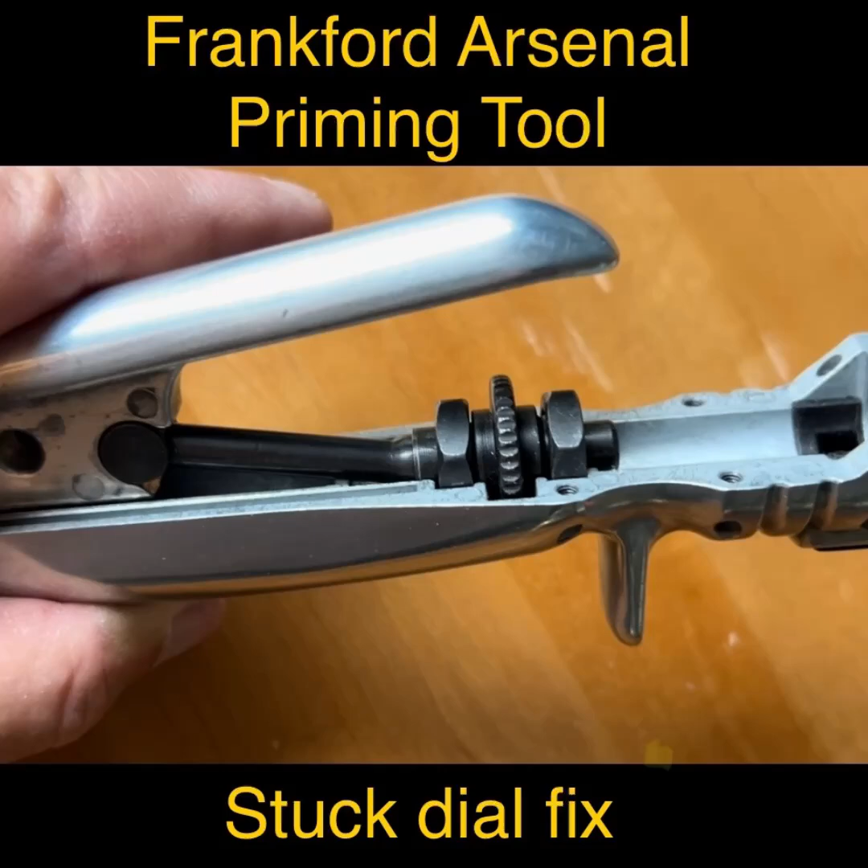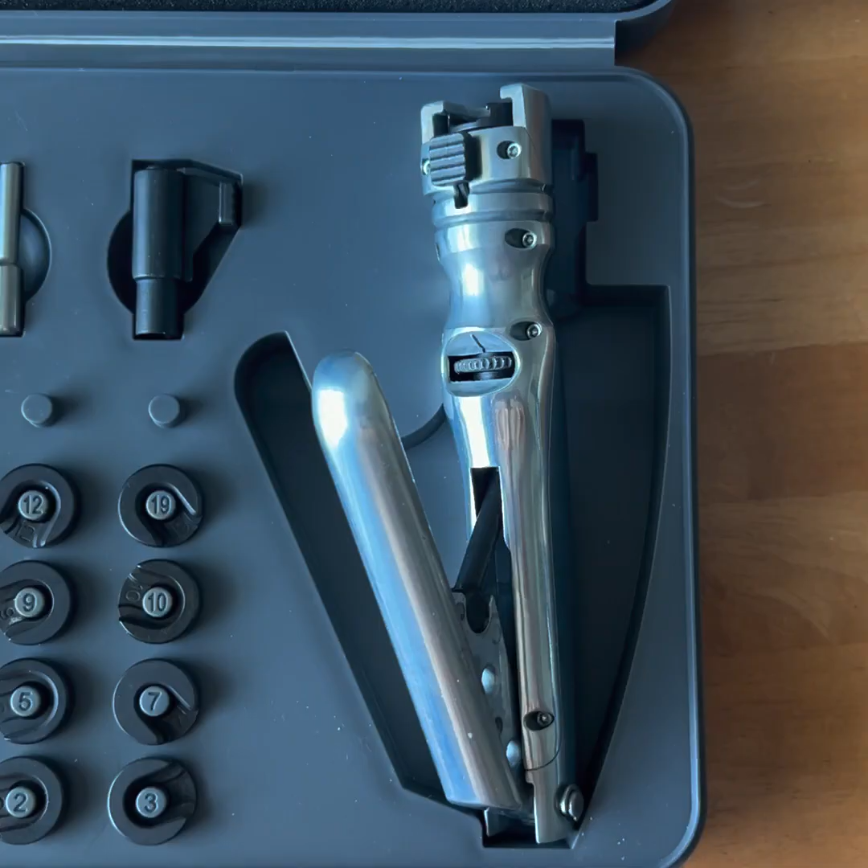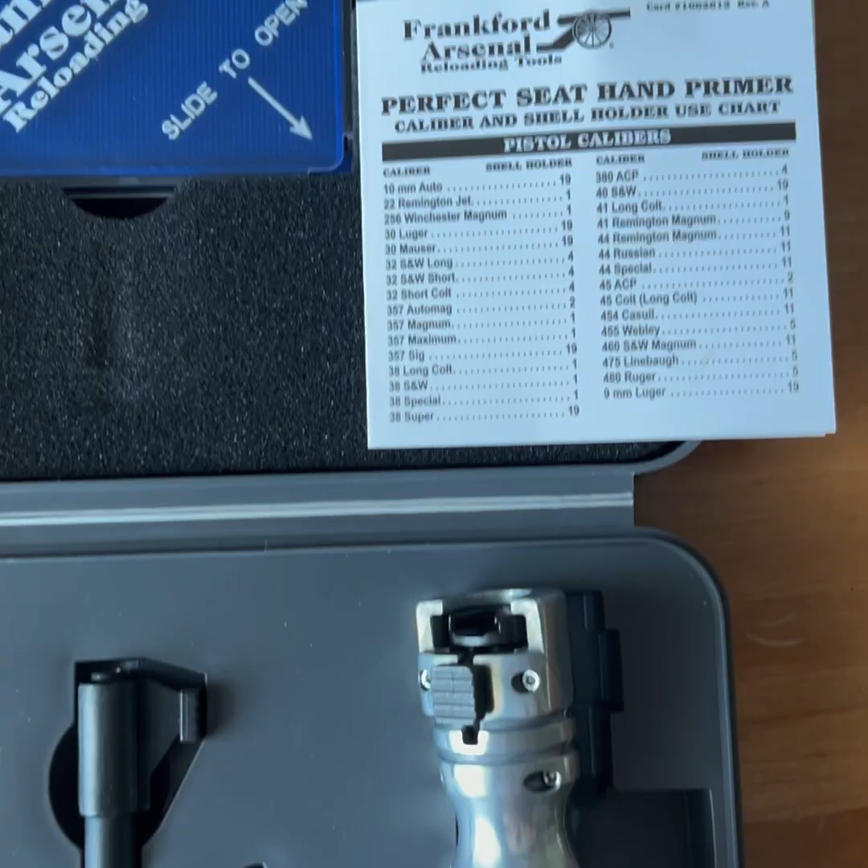The Dial of Disappointment. This is the Frankford Arsenal hand priming tool, and it appears to be a well-constructed tool with numerous shell holders for various calibers, a large and small priming rod, a primer tray, brief instructions, and a guide for shell holders for different calibers.

The problem I had relatively quickly in using this as a brand new tool is that the dial would freeze up, and turning the dial left or right adjusts the seating depth of the primer by about 1/1000th of an inch. When I tested it, there were about 32 clicks between left and right, so it gives you very fine control.

However, the dial has locked up, and I've disassembled and reassembled this numerous times, freeing the dial momentarily, but it locks up again. What this video is about is to disassemble and show what's going on, and to fix the dial once and for all.

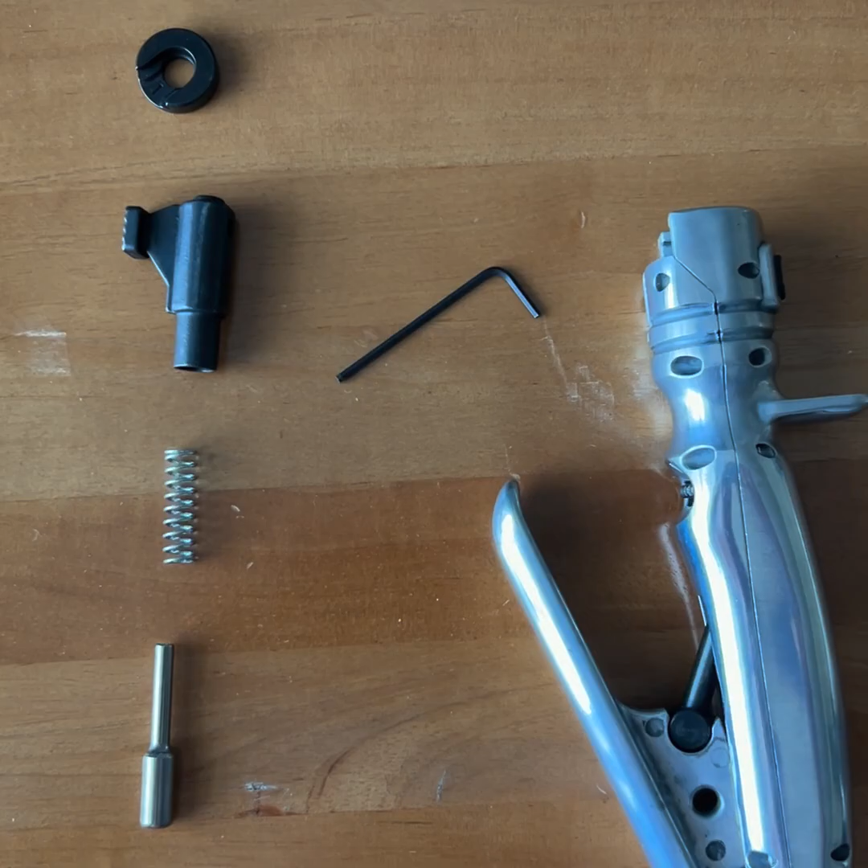The first step is to remove the shell holder and the priming rod, and then remove the 8 screws that hold the two halves together. I've removed the priming rod, spring, sleeve, and shell holder. To remove the screws, you'll need a 5/64 Allen wrench. The screws are all the same size, so you don't need to worry about keeping them in order.

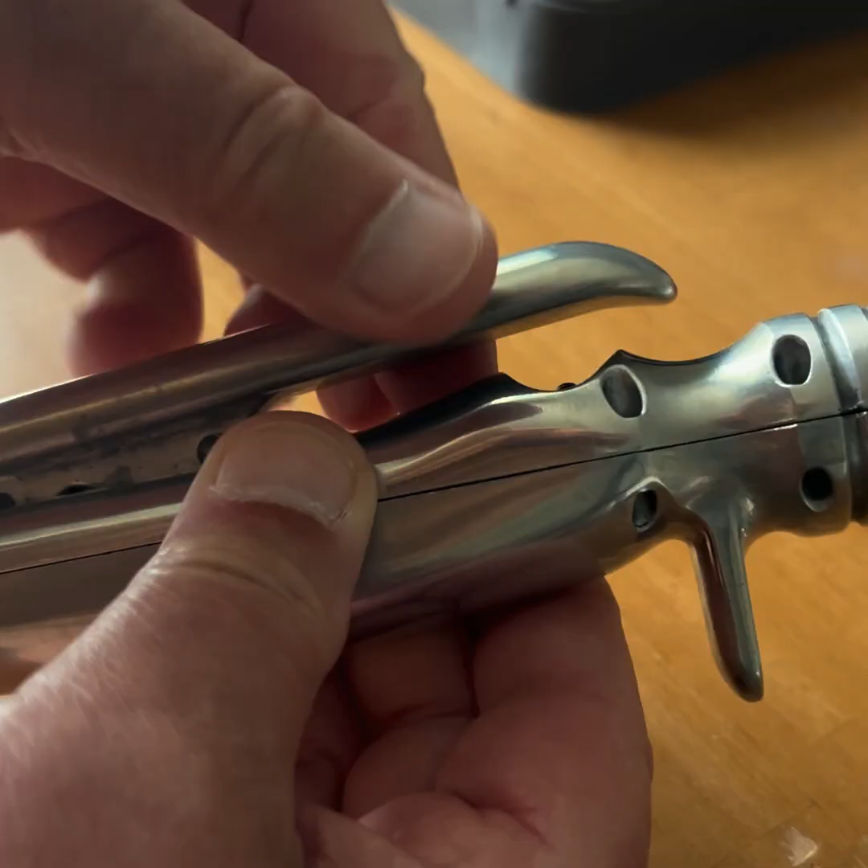Before I separate the two halves, I want to demonstrate that the dial still does not turn. It's stuck.

When you reassemble, it's important, before you put the screws back in, to verify that the dial will turn. The way this is designed is that there is a dial.

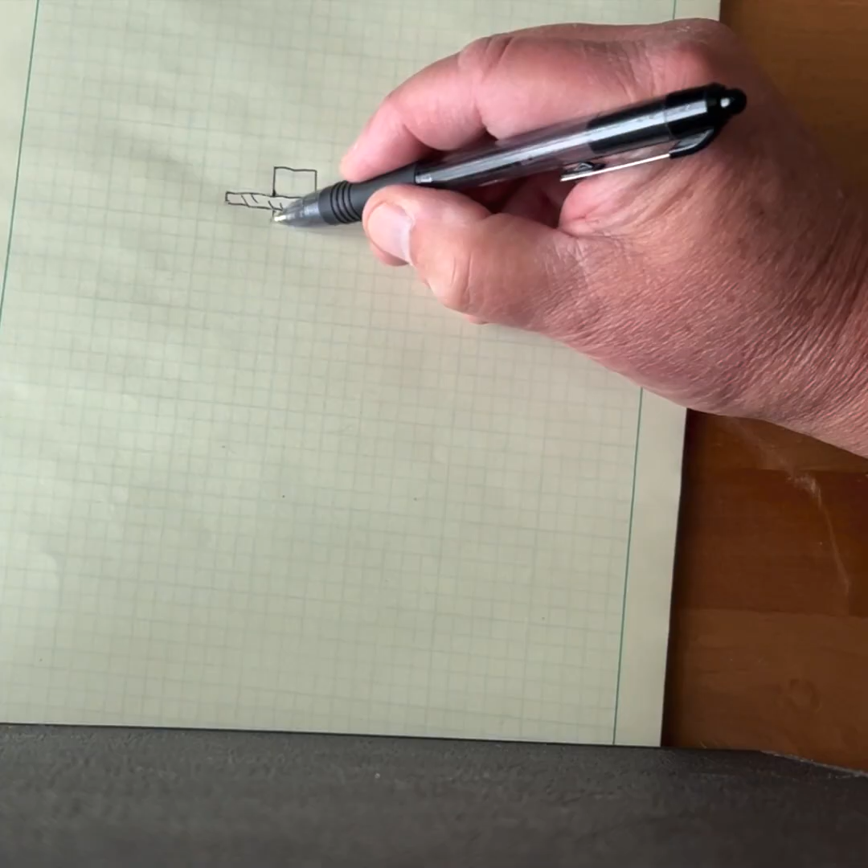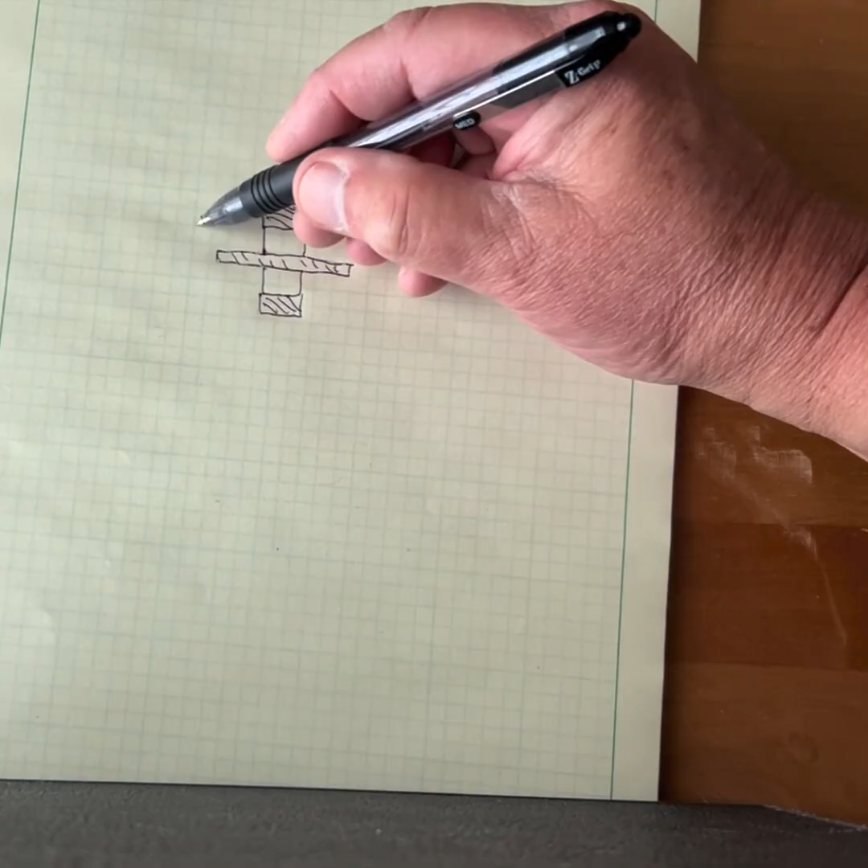It's connected to a fixed and hollow shaft, and there's threads at this end, threads at this end, and there are 2 captive nuts at the threaded ends.

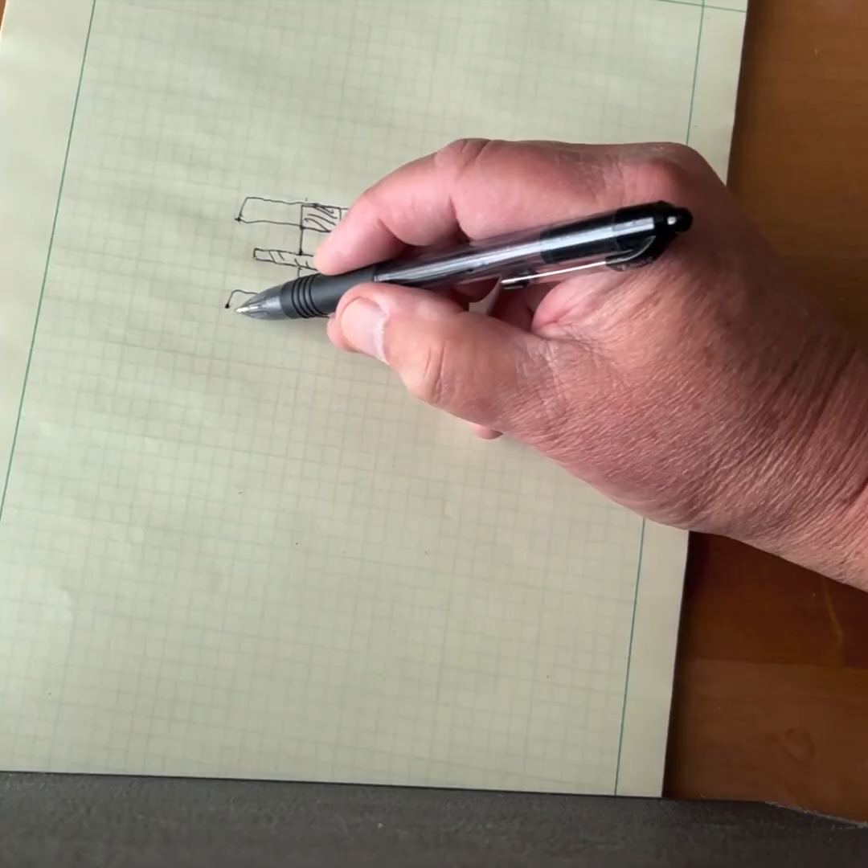As you turn the dial to the left, the dial and its shaft will go down. As you turn the dial to the right, the dial and the shaft will go up. The nuts won't move; both the dial and the shaft will move up and down.

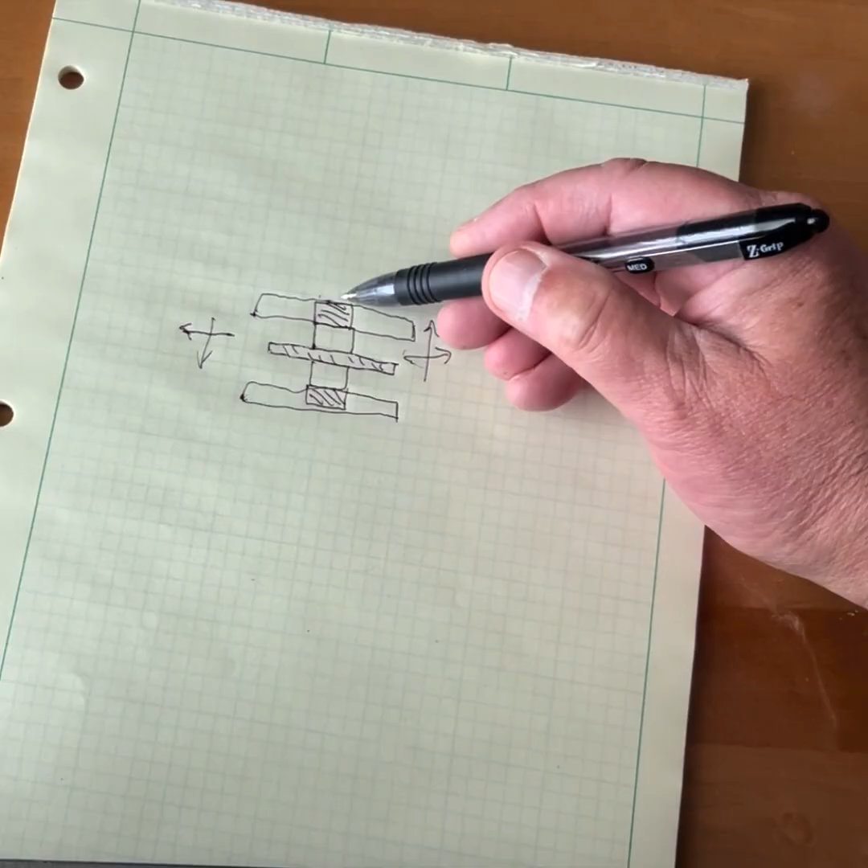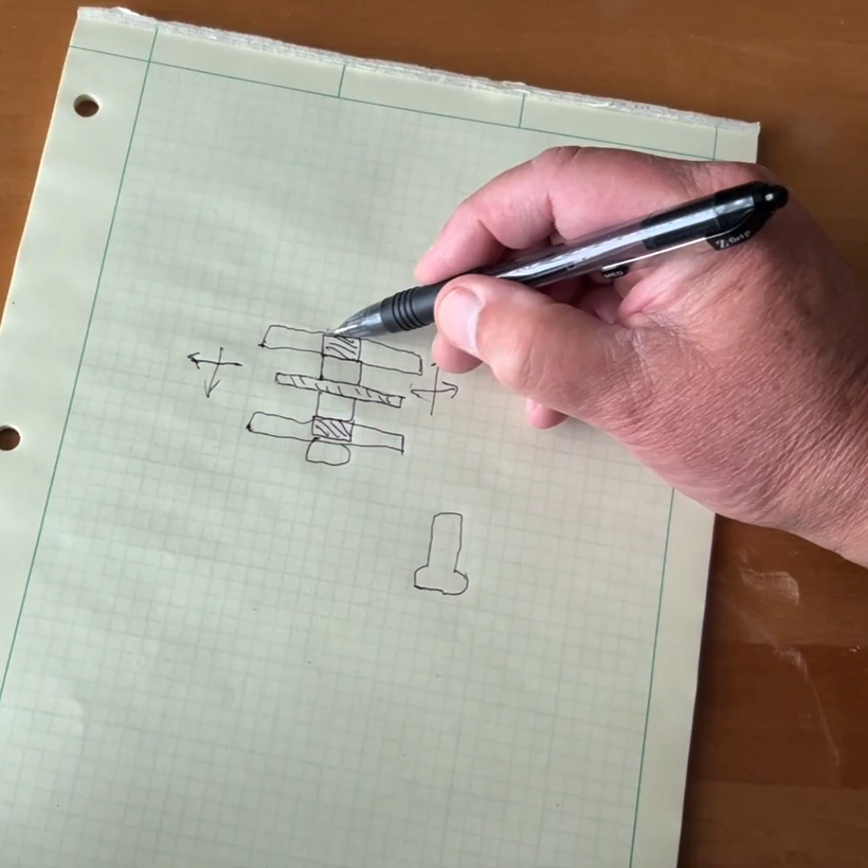Additionally, there is what I will call a center rod, roughly shaped like that. The center rod goes into the shaft, comes out here. What stops the center rod from moving is the end of the shaft, not the nut.

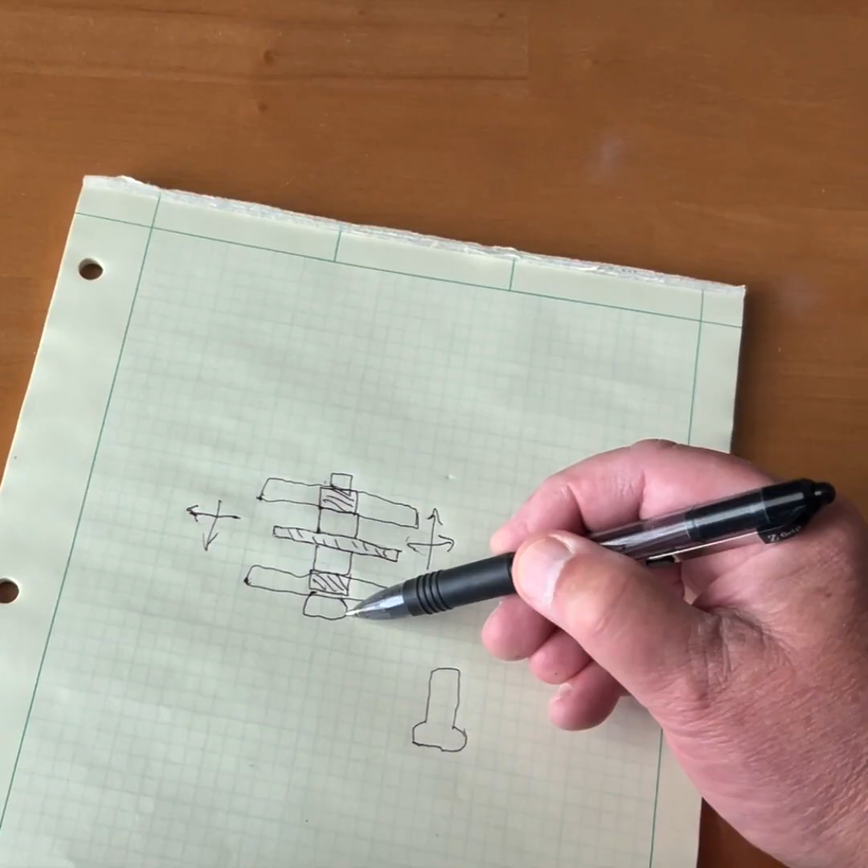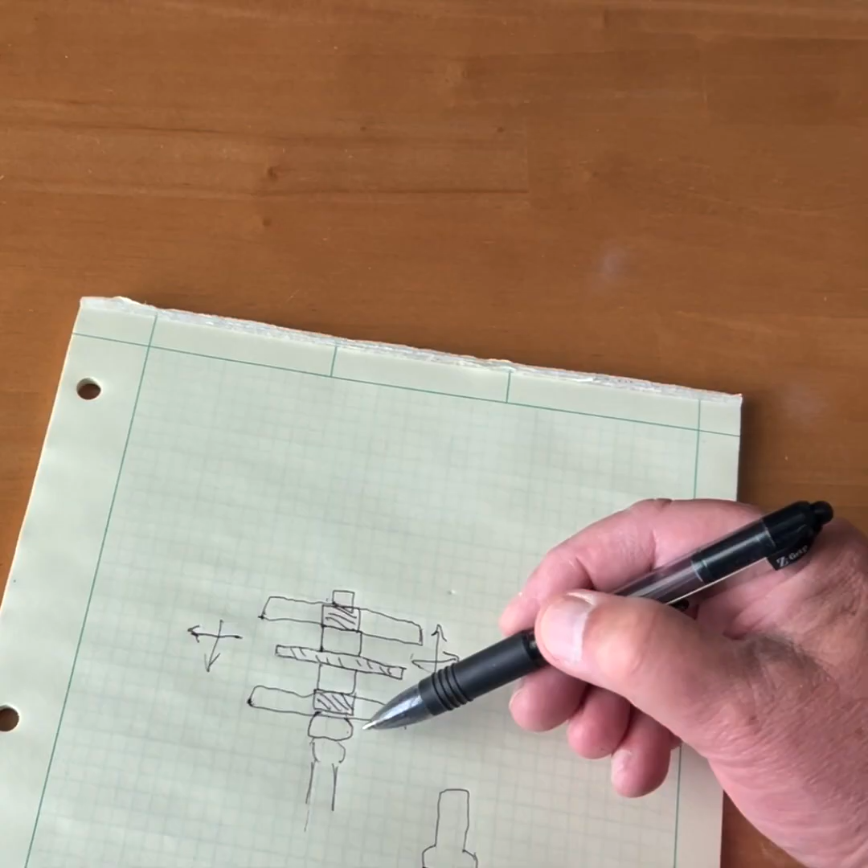So as the dial is turned left or right, and the dial and the shaft together move up and down, that will control how far this center rod can be pushed up by the plunger on the handle. If you move the dial to the left and the shaft and dial go down, then this center rod will not be able to rise as high when you press the handle as if you were to turn the dial to the right and raise the shaft.

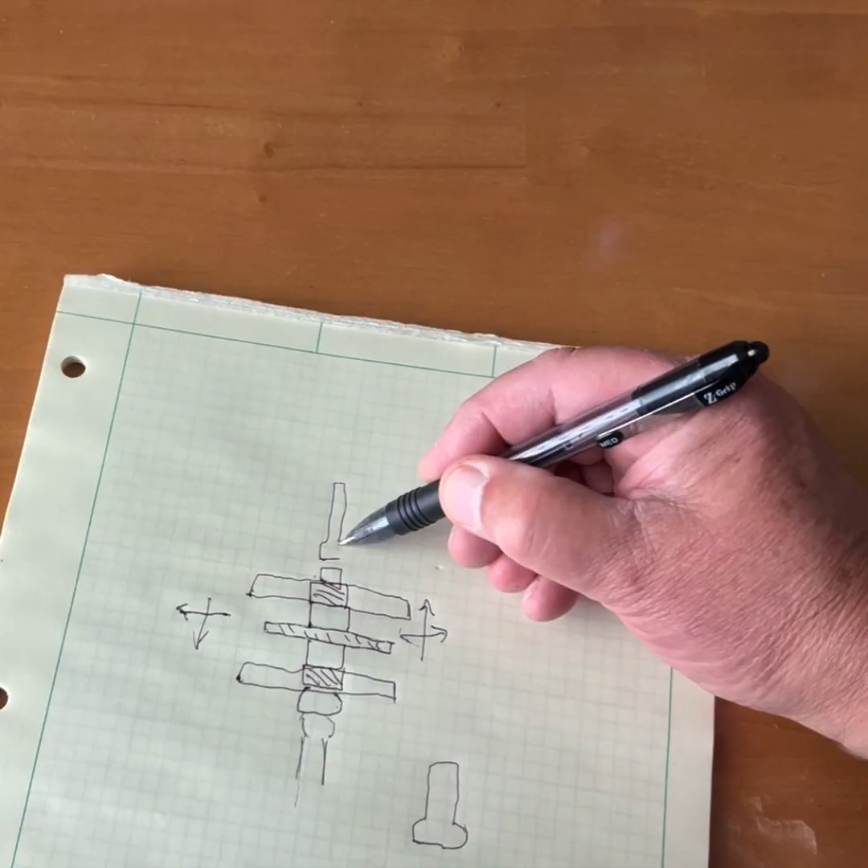That will allow this center rod to go higher, and that's basically what's controlling your seating depth, because right here is where you're priming what Frankford calls the priming pin. I call it the priming rod, and here's your shell holder up here.

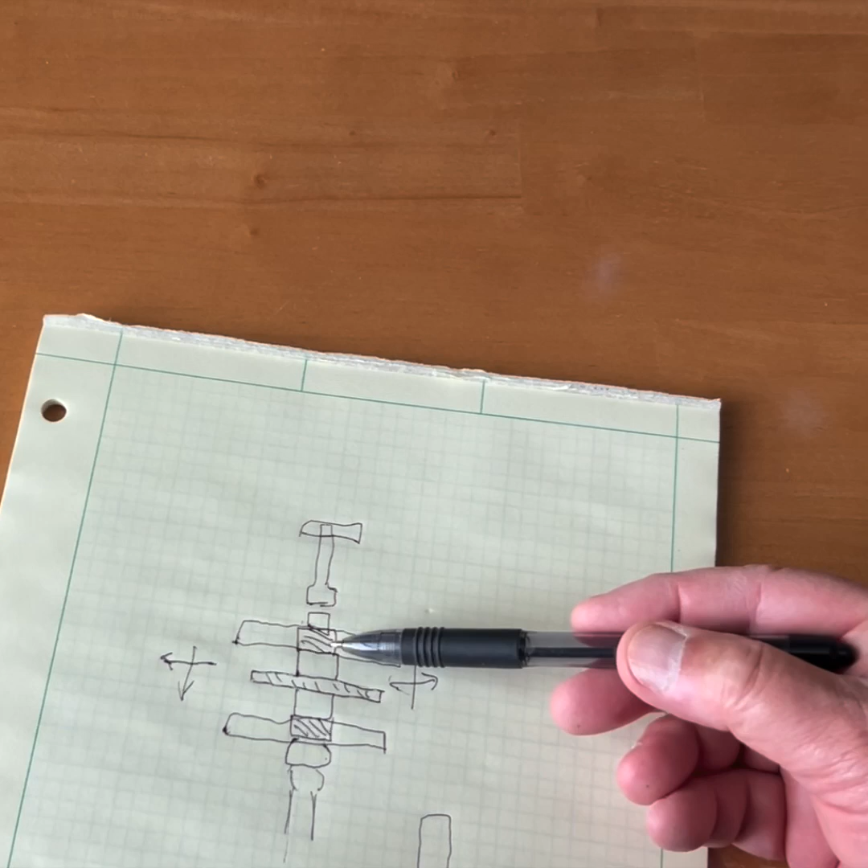So the critical thing is that the dial and the shaft, the hollow shaft with this center rod, is what really controls your depth. And again, the center rod can only go as high as the bottom of that shaft.

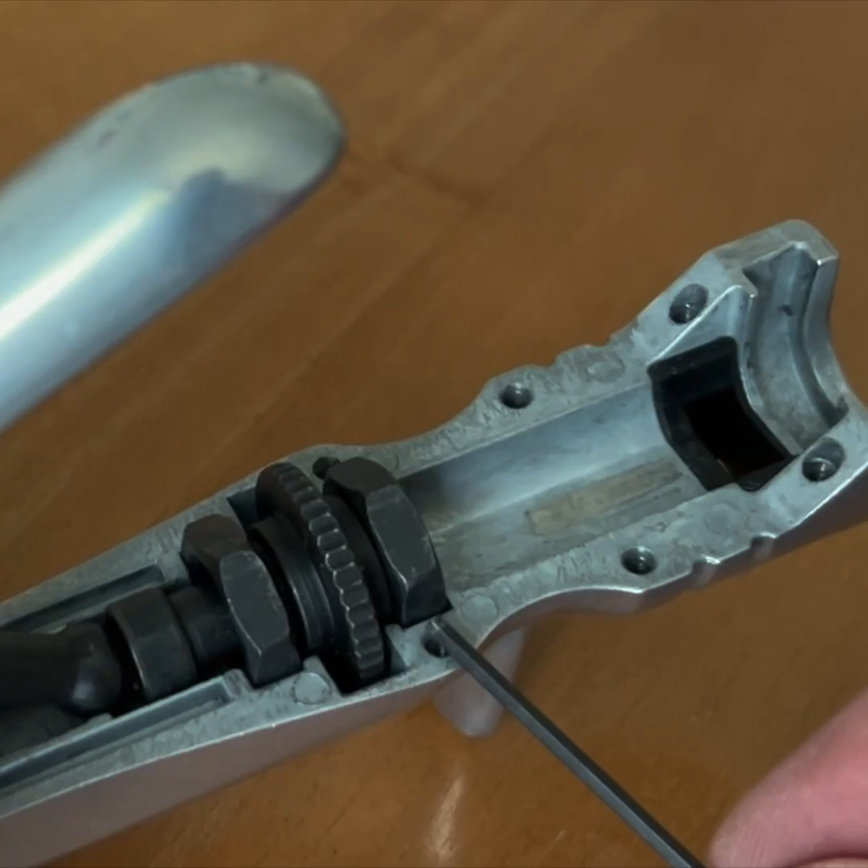You can see the two captive nuts here, the dial, and this is the center rod, which will rise at the top. As you press down on the handle, the center rod is pushed up by the plunger, and you can see it rising out of the center rod, and it stops at the end of the shaft.

We need to find out why the dial does not turn to raise and lower the shaft. Let's look at that in a little bit more detail.

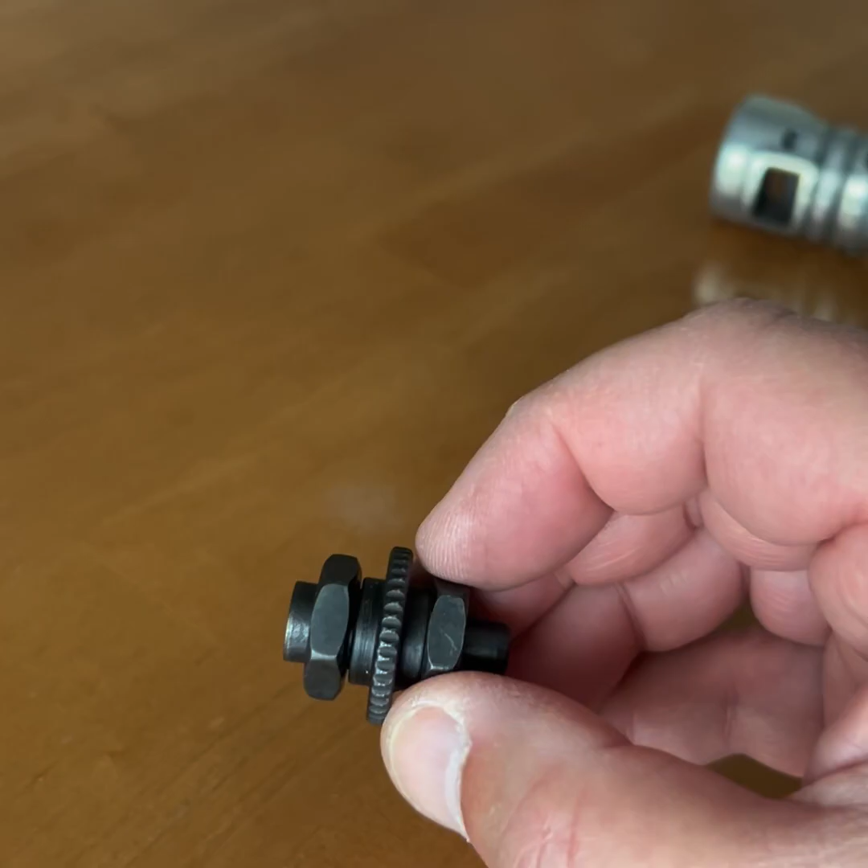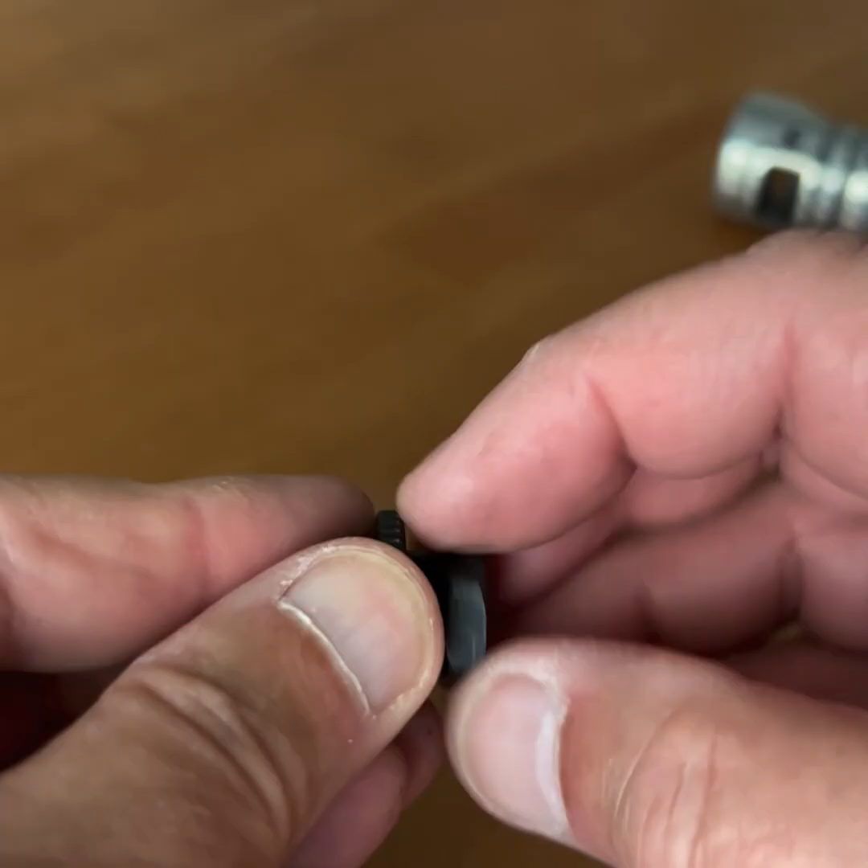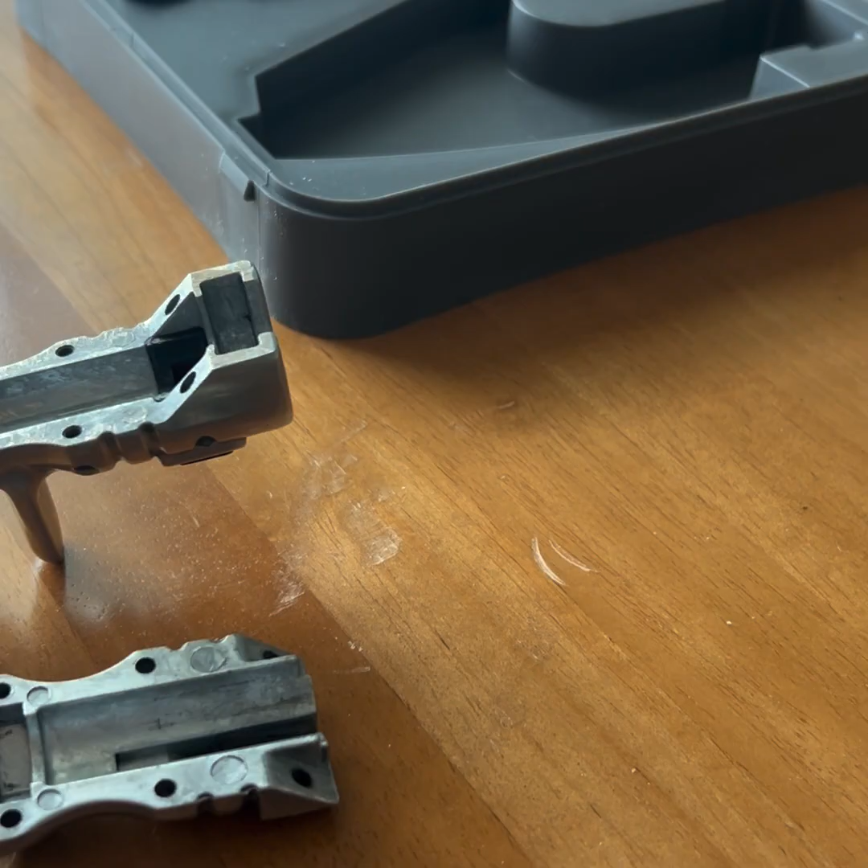Let's simplify what we're looking at here. We have this, and remove the lower nut and the upper one, and that leaves us with this. It appears to be symmetrical, but not really, because there are a lot more threads on that end than on the other. So first you'll see in the bottom half the two areas here and up here where the nuts are held captive.

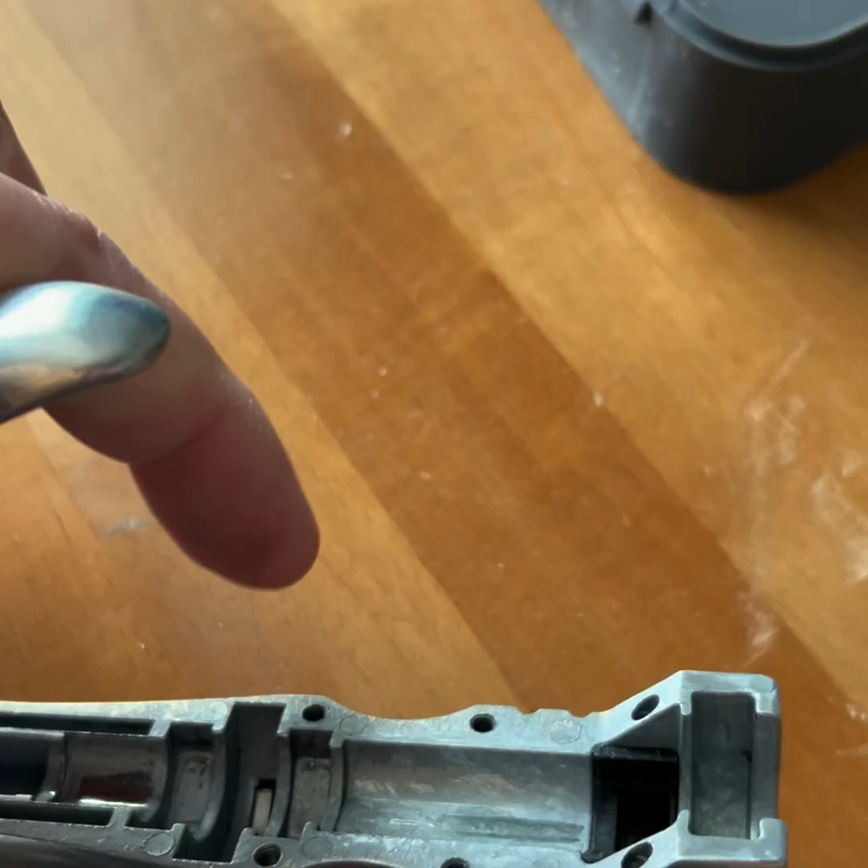In the center there's this little flat spring that the dial rotates against. The longer end is now going to be pointed upward towards the priming end of the tool, and this is the bottom of the tool. It makes sense that this shorter end should be oriented there, because it allows the plunger to push a little bit further.

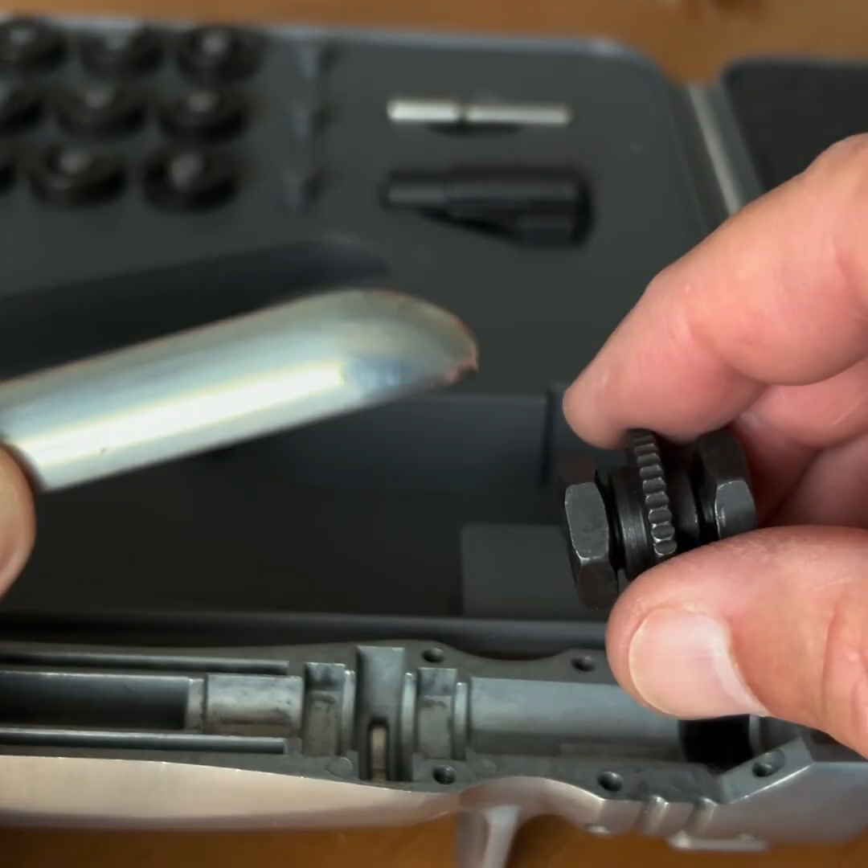I think the two most important things are that the vertex of the nut is basically vertical, so that the vertex will fit here in the top half and down here in the bottom half, because if it's not right at the very top, the nut will not settle properly, and you won't be able to get the two halves together.

The other important thing is that there should be some freedom of movement, and when you put the nuts back on the shaft, they shouldn't be so far apart that they don't fit in the slots here. There is some room for play, and when you put them on, you should get it just so that they will just drop in, and again, also not butted up against the center part of the dial here. So nothing is really tight.

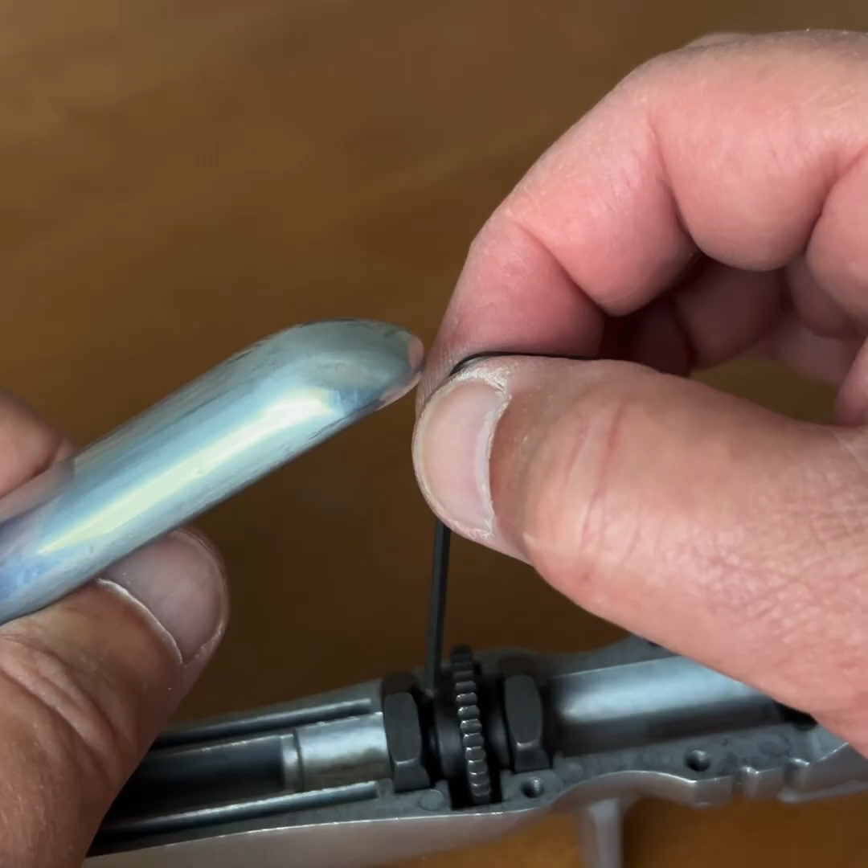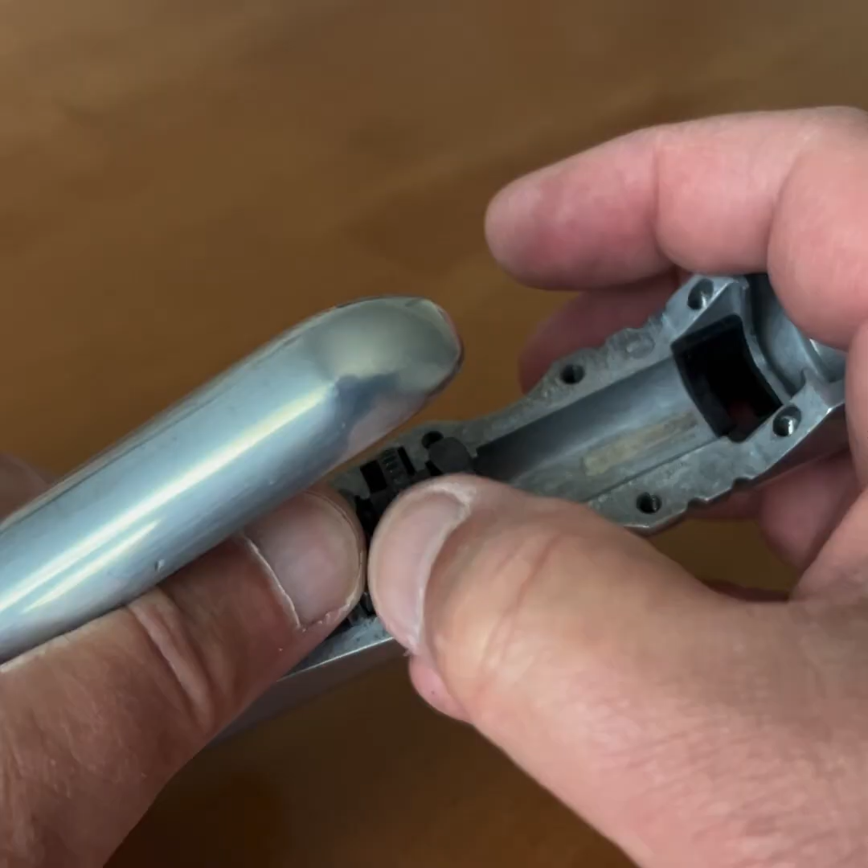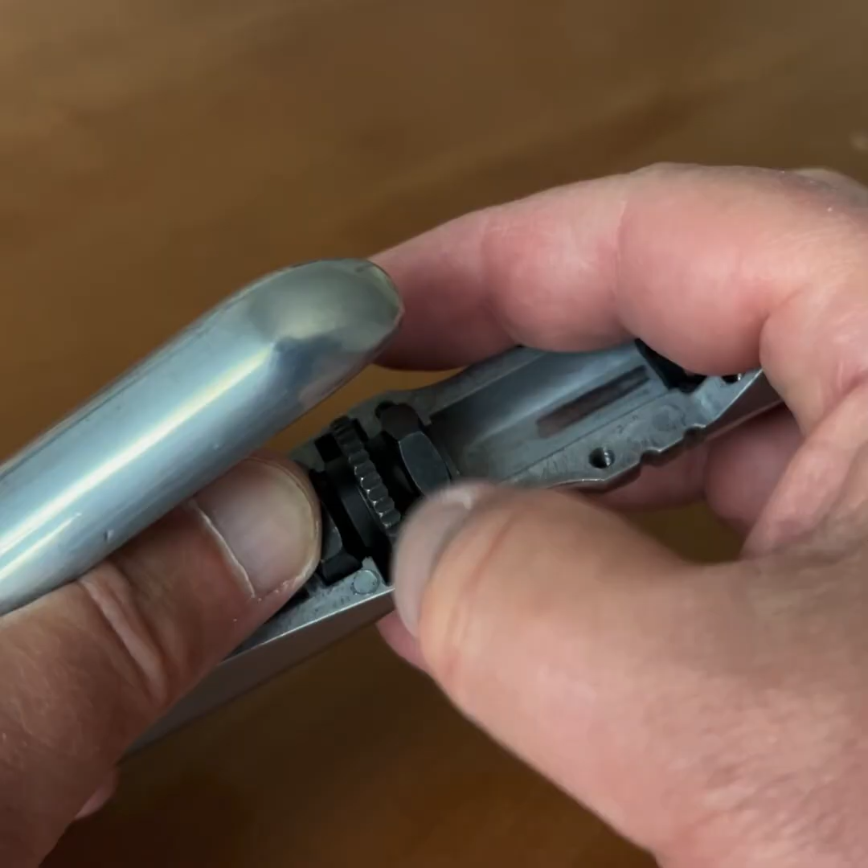In fact, you can even see the gap there and less of a gap there. Here's a better view. So I can turn the dial all the way to one end and then all the way to the other end. I can feel it come to a stop, but it's relatively easy to get it to come back and go to that end. So there's full freedom of movement here.

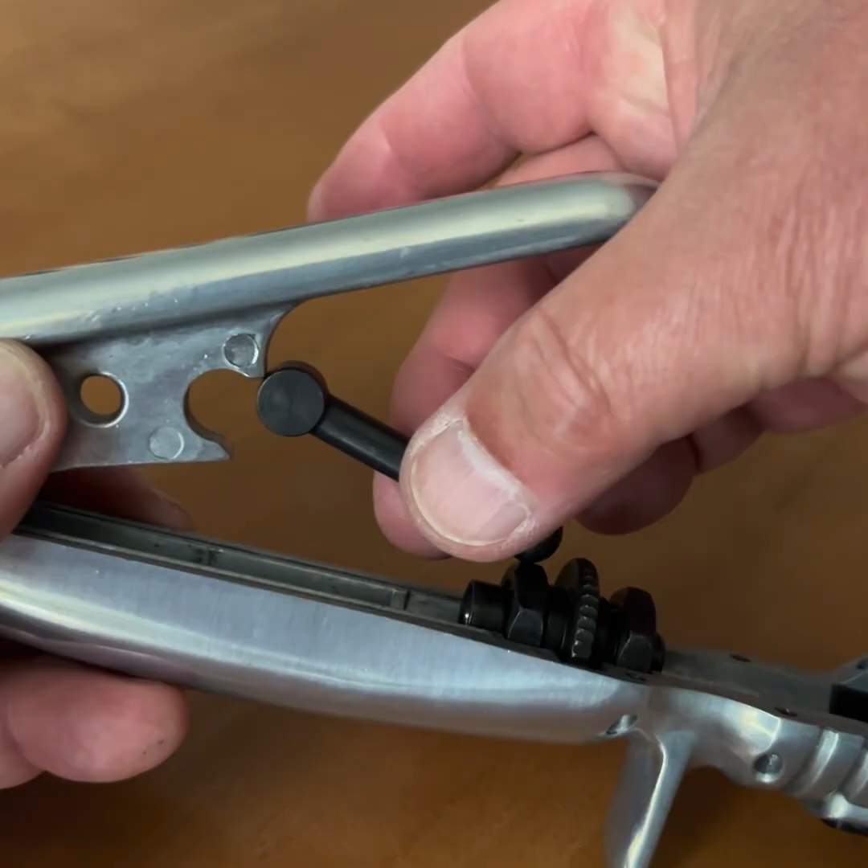So I will put this back in and then put the top half on, and we'll see if the dial still moves. Okay, so this plunger actually needs to be put in with the top half off.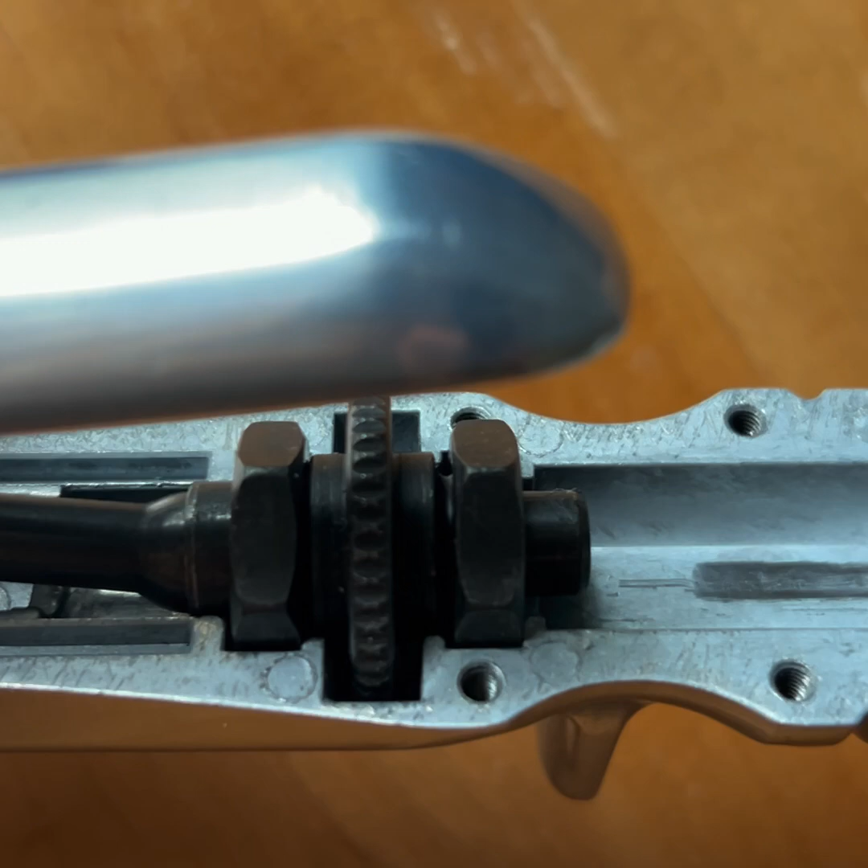Before final assembly, I want to show how this is fit in here. I have the dial centered in its slot there, and I have the two nuts positioned so that the vertex is at the top, and there is actually a bit of a gap between the shaft and the nut. That may show the gap a little bit better. So I don't want anything butted up against the nut. Now I'm going to put it back together and give it a try.

And the dial still moves back and forth. So no problem there. Time to put the screws back in.

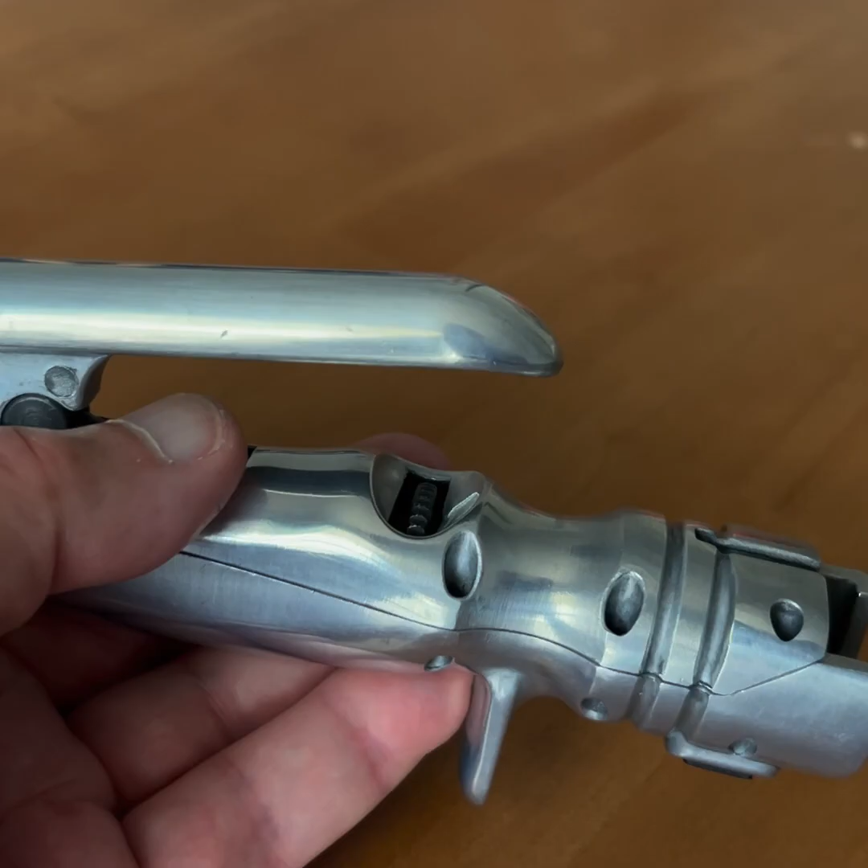It has been reassembled again, and I have the dial set to its lowest setting, and I'm not going to push it too hard against that low setting. And you can see that's a lot better.

Let's put it up a little bit higher, and again, I'm not going to push it up hard against that stop. It's quite a range of travel there. And you can see that's a lot higher.

I think that has solved the problem.